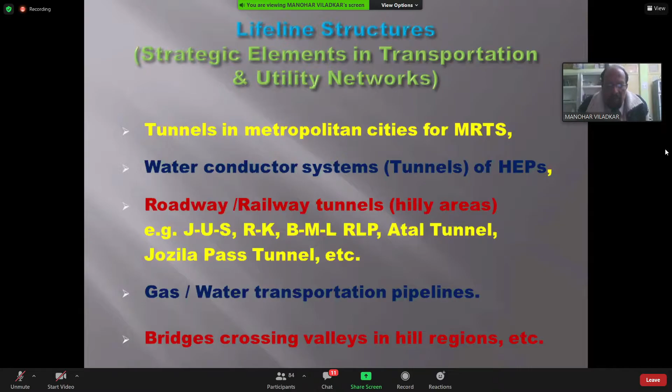But apart from these tunnels for different purposes, we also have gas and water transportation pipelines, and similarly the bridges which cross valleys in hilly regions. Now these are structures which are very long in comparison to their cross-sectional dimensions. You have pipelines which run over a length of a few hundred kilometers, metro underground systems that run over a length of a few kilometers, and railway line projects in hill areas that run to a length of about a few hundred kilometers.

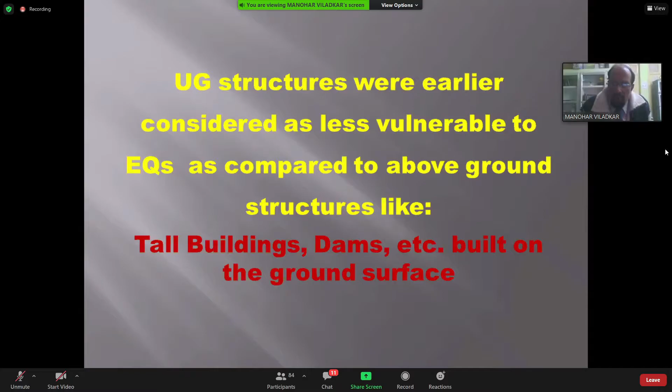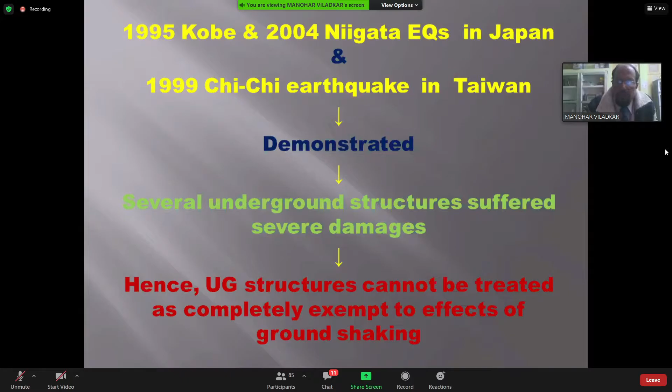Underground structures were earlier considered less vulnerable to earthquakes compared to above-ground structures like tall buildings and dams built on the ground surface. However, the 1995 Kobe earthquake, or the 1999 Chi-Chi earthquake in Taiwan, clearly demonstrated that several underground structures can suffer severe damages depending upon various parameters at a site. Therefore, underground structures cannot be treated as completely exempt from the effects of ground shaking.

In India, there is a growing need at present to enlarge infrastructure, especially in hill areas. We have mass rapid transit system networks in metropolitan cities, all-weather connectivity in hill areas, particularly the northern and northeastern states, and also connectivity in strategically important areas from the defense point of view. Because of these, there is a renewed interest in studying the vulnerability of lifeline structures to seismic loading.

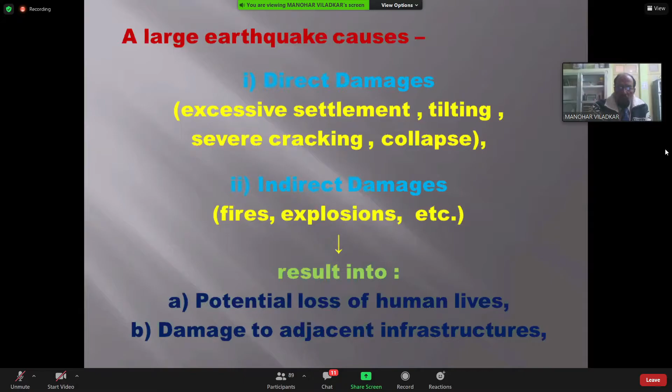A large earthquake causes direct damages in the form of excessive settlements, tilting, or severe cracking of structures, and sometimes even collapse of structures. There are also indirect damages in the form of fires and explosions, which result in potential loss of human lives and damage to adjacent infrastructures. All this causes severe economic losses, especially in view of the time required to restore the functionality of various infrastructures. It is therefore essential to reduce the possible associated damages and their consequent effects.

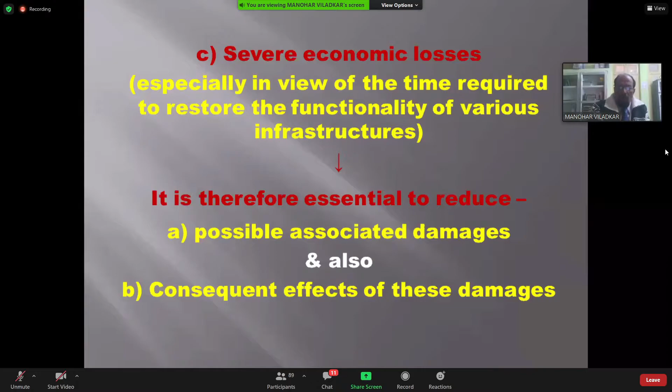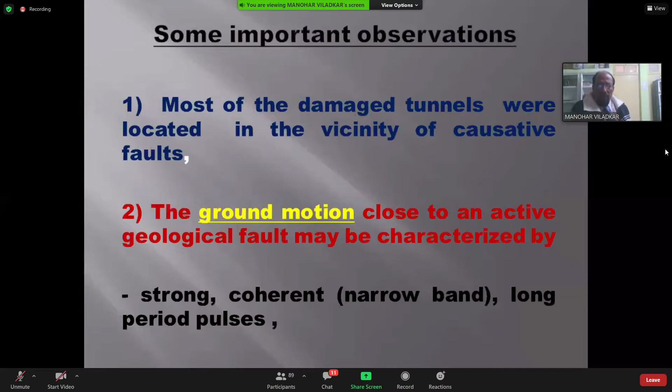Most of the tunnels - there are some important observations based on earlier failures in such lifeline structures. Most of the damaged tunnels were located in the vicinity of causative geological faults. The ground motion close to an active geological fault may be characterized by strong, coherent, narrow-band, long-period pulses, and this ground motion is severely affected by the rupture mechanism along the fault plane and the direction of rupture propagation in relation to the particular site or project in question.

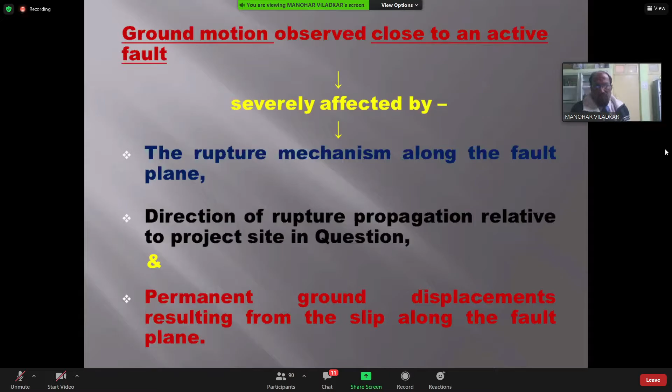There can also be permanent ground displacements resulting from slip along major geological fault planes. Based on a study of damage to about 71 tunnels excavated in rocks due to earthquake shaking, and comparison of their behavior with estimated values of peak ground acceleration and peak ground velocity, it was suggested that collapse of tunnels due to ground shaking occurs only under extreme conditions.

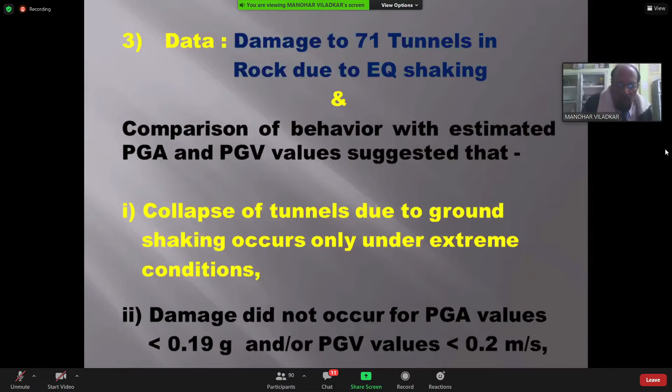It was found that damage did not occur so long as PGA values were less than about 0.2 g, or PGV values less than about 0.2 meter per second. Minor to moderate damages were observed when PGA values approached about 0.5 g, whereas moderate to heavy damage was experienced when PGA values exceeded 0.5 g.

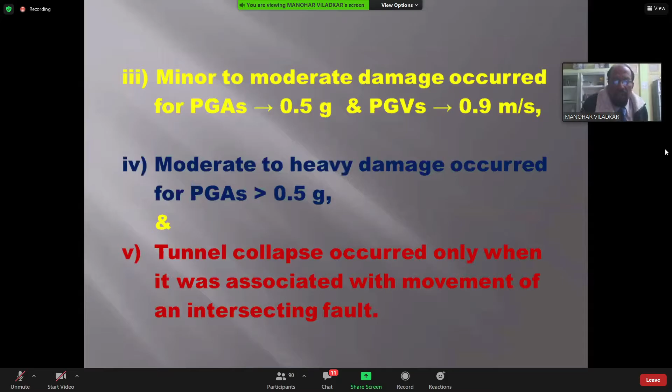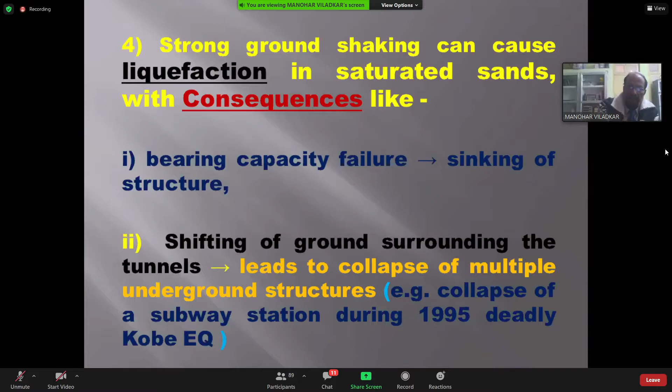The tunnel collapse occurred only when it was associated with the movement of the intersecting geological fault. The strong ground shaking can also cause liquefaction in saturated sands, with consequences like sinking of structures or shifting of the ground surrounding the tunnels, which leads to collapse of multiple underground structures. The famous case is the collapse of a subway station during the 1995 Kobe earthquake in Japan. This liquefaction is also responsible for causing landslides, consequently damaging highway facilities.

Landslides also generate secondary impacts. There occurs a rupture of water and gas supply pipelines, and more importantly, the electrical transmission lines, which cause dramatic explosions and fires. This was what exactly happened during the 1994 Northridge earthquake in USA, when the ruptures of the gas pipelines occurred.

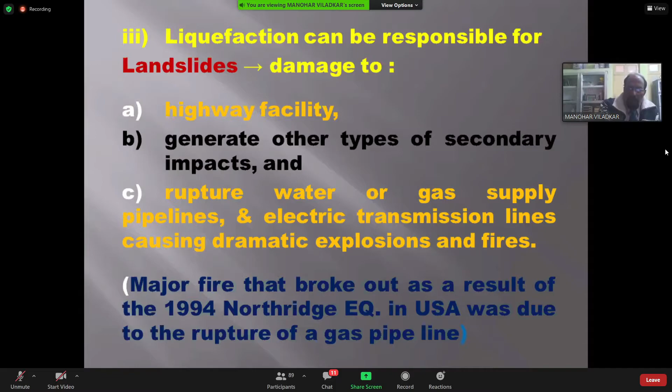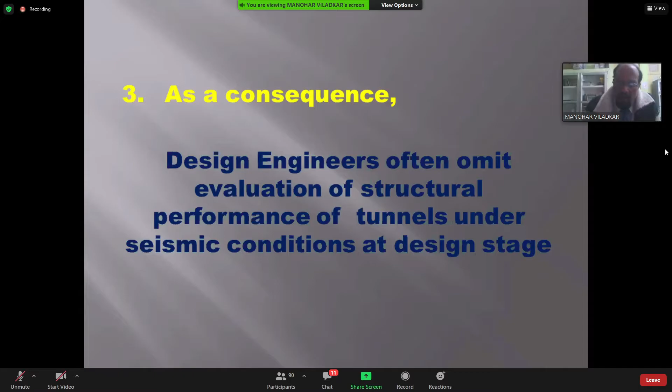The net outcome of this is that seismic analysis of underground structures is a complex task, as it involves interaction of several disciplines, including structural geology, seismotectonics, engineering seismology, soil and rock dynamics, and also structural dynamics. This area has remained somewhat neglected, primarily because of the conventional notion that underground structures are not sensitive to earthquakes. As a consequence, design engineers often omit the evaluation of structural performance of tunnels and such lifeline structures under seismic conditions at the design stage.

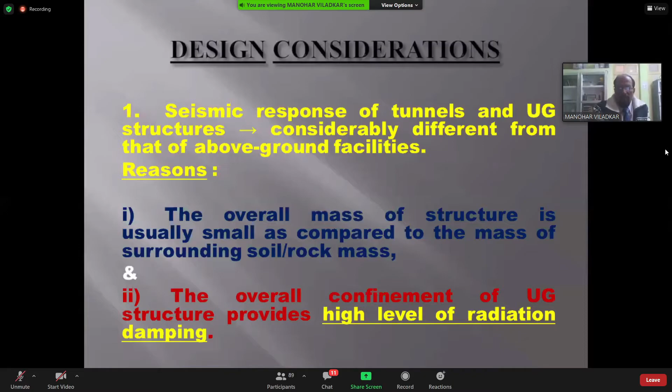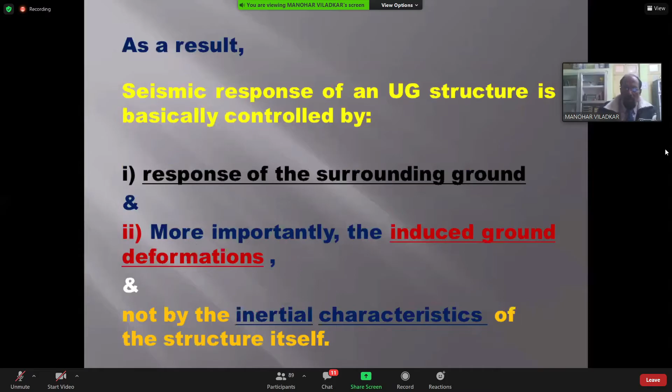Let me bring out some of the design considerations which should be followed while carrying out initial designs. The first one is that seismic response of tunnels and underground structures is considerably different from that of above ground facilities, because the overall mass of the structure is usually very small as compared to the mass of the surrounding soil or rock mass. The overall confinement of the underground structure by the surrounding soil or rock mass provides a high level of radiation damping, and as a result, seismic response of underground structures is basically controlled by the induced ground deformations rather than the inertial characteristics of the structure itself.

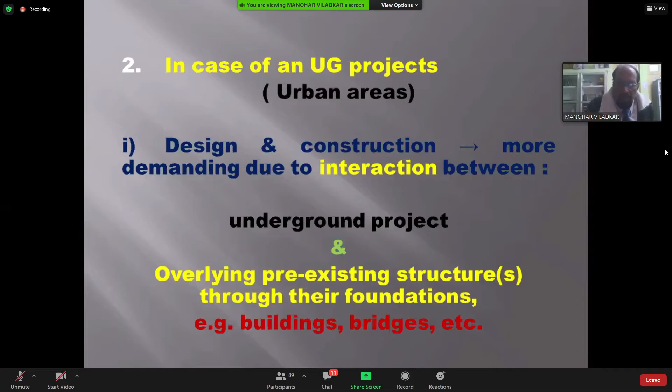In case of underground projects, particularly in urban areas, design and construction is more demanding because of the interaction between the underground project and the overlying pre-existing structures through their foundations. These are the issues where people go to the court of law to seek compensation in case the above ground structure is damaged or affected by the underground activity.

The interaction of these underground lifeline structures is basically a function of the depth of overburden or the thickness of the overburden above the bedrock, and the nature of topography, particularly in hill areas. The topography is very uneven. This results in what we call seismic amplification, and this seismic amplification was the cause of damage to bridges during the 1995 Kobe earthquake.

It was also the cause for damage to the underground tunnels and buried gas pipelines during the 1999 Chi-Chi earthquake in Taiwan. So therefore, the selection of realistic ground motion is very important from the seismic analysis and design point of view of these lifeline structures. The time history of earthquake has to match the expected earthquake in that particular zone or at the particular project site in question, and hence there is a need for what we call the response spectra compatible time history.

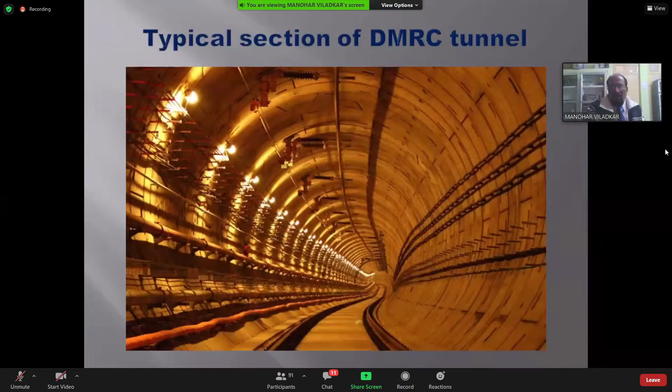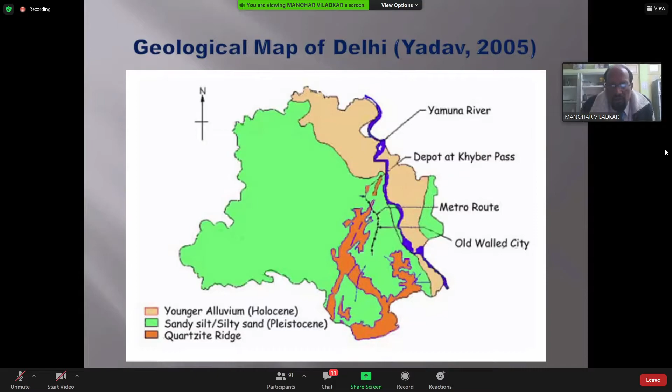I'm going to briefly take the case of Delhi Metro underground tunnels, particularly constructed in the early phase 1. This is a typical cross-section of the DMRC tunnel in Delhi. Delhi lies... this is the geological map of Delhi city. You have got the Yamuna river flowing in the north-south direction. And you have got basically either the younger alluvial deposits or the sandy silt deposits below the ground surface in Delhi city. In some portions in the north-south direction, you have also got the quartzitic ridges.

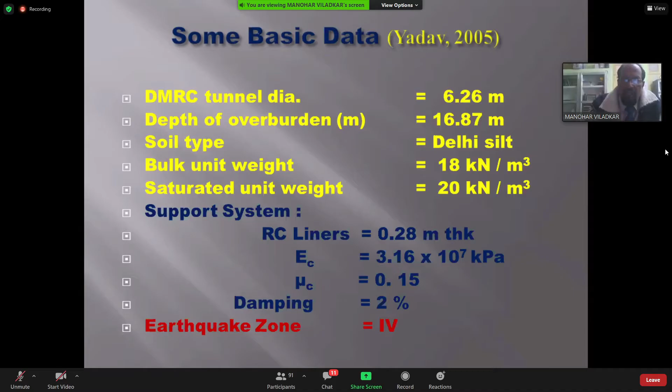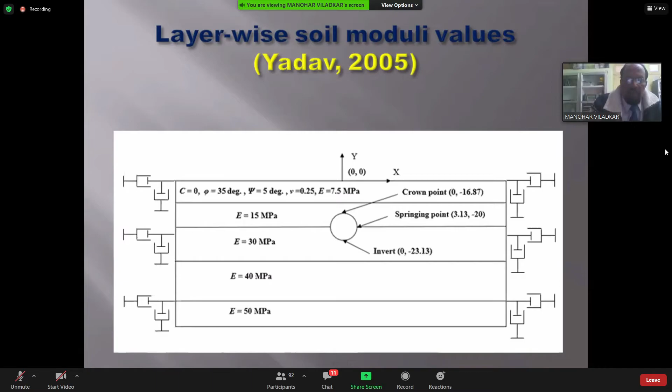The tunnel diameter is about 6.26 meters, and the depth of overburden above the crown of the tunnel is about 16 or 17 meters. The tunnels are provided with precast RC liners, and you know very well that Delhi lies in seismic zone 4 as per the seismic map. The modulus of the soil mass varies from the ground surface, with a value of about 7.5 megapascals to about 50 megapascals at a depth of about 60 to 70 meters below the ground surface.

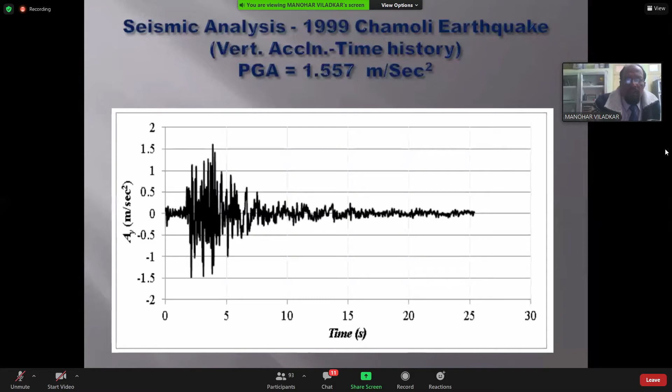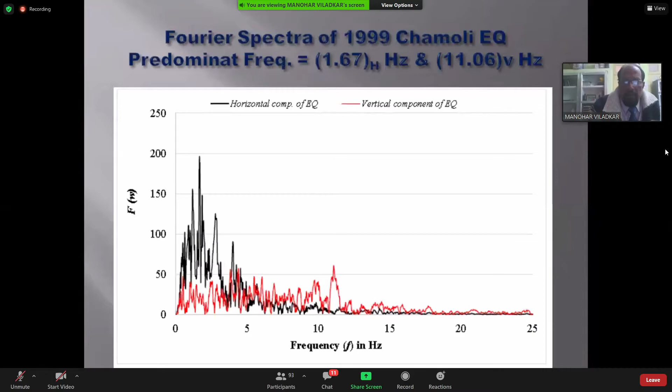In order to develop the response spectra compatible time history, we tried to generate the target response spectra on the basis of IS code 1893. This was generated both for the maximum considered earthquake and the design basis earthquake, for different values of damping ratios of Delhi silt corresponding to about 5%, 10%, and 15%.

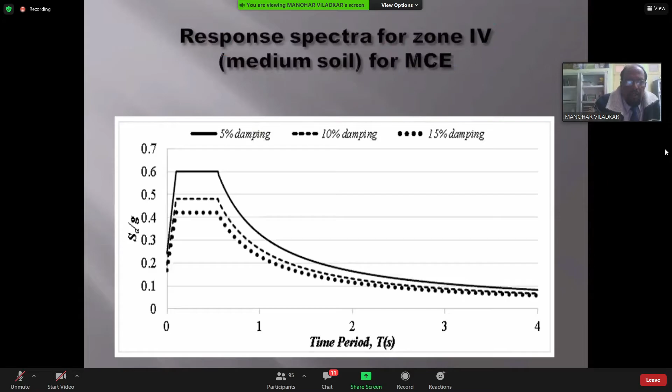That's the typical response spectra for the maximum considered earthquake for zone 4 of Delhi for different values of damping, including 5%, 10%, and 15%. So I find that corresponding to the minimum value of damping, I've got a maximum PGA of about 0.6.

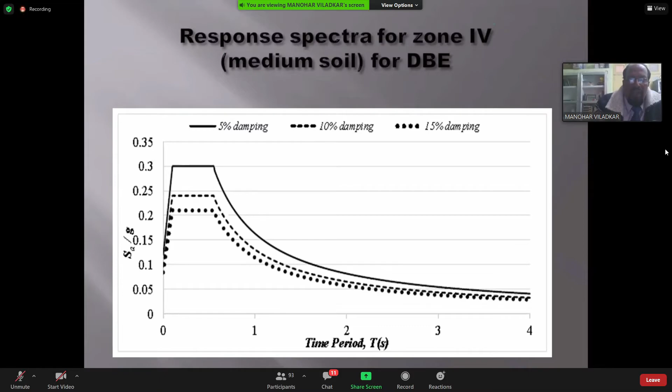This is the response spectra corresponding to the design basis earthquake, and I find that the magnitude of SA upon G is roughly half of that for the MCE.

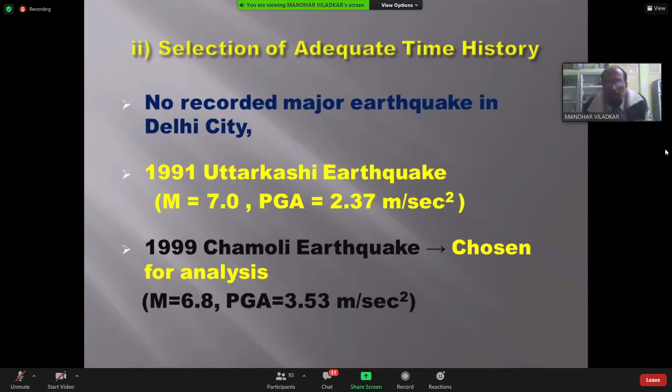Then we have to select adequate time history. In fact, in Delhi, there is no record of a major earthquake, so the nearest earthquakes were the 1991 Uttarkashi earthquake with a magnitude of 7.0 and a PGA value of 2.37 meters per second square, and the 1999 Chamoli earthquake with a magnitude of 6.8, but a PGA value much higher than Uttarkashi, at 3.53 meters per second square.

Now, Chamoli and Uttarkashi lie in zone 5 of the seismic map, whereas Delhi city lies in zone 4, and therefore there was a need to generate artificial time history for Delhi city.

Taking a magnitude of acceleration from the target spectra and a phase from the input history, response spectra compatible time histories were generated using three software packages: SPEC3 and WaveGen, which were developed at IIT Roorkee, and Seismomatch, developed by Hancock and his team in 2006.

The typical observation is that the trend of the artificial time history generated by the Seismomatch software developed by Hancock is quite similar to the actual earthquake, except for a difference in the value of PGA.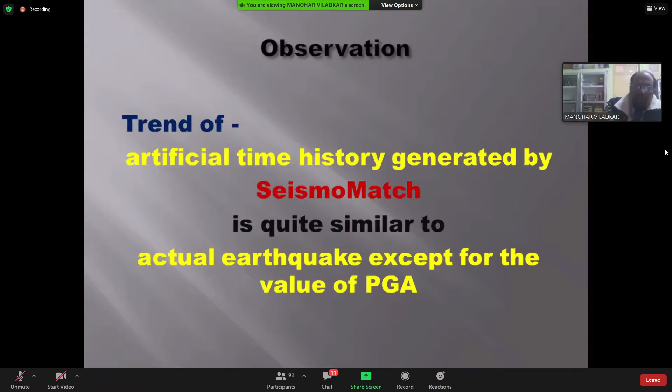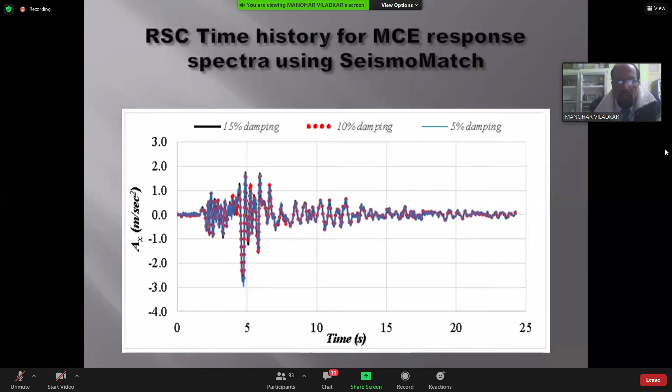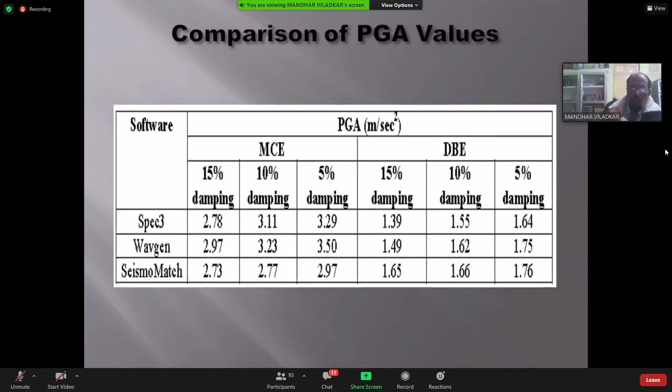So this is a typical response spectra compatible time history obtained by the Seismomatch software corresponding to 5, 10, and 15% damping ratio. When I try to see the effect, I find that both for MCE and DBE, the PGA values go on increasing as the damping ratio goes on reducing.

When I study the horizontal displacements of the soil tunnel system, I find that the Seismomatch software gives a value of about 200 mm near the ground surface, and very close to it at other points around the periphery of the tunnel, including the crown, the invert, and the springing points. The DBE also gives the same range of horizontal displacements.

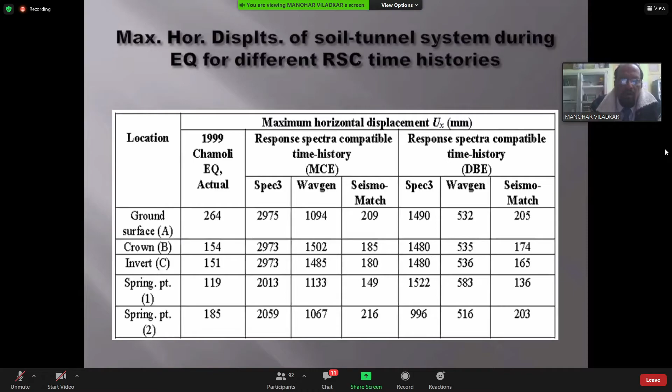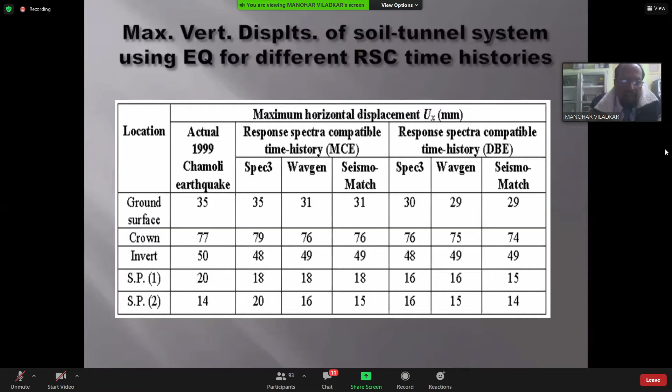As far as the vertical displacements are concerned, all three software packages, or all three response spectra compatible time series for MCE and DBE, give values which are very close to each other at all the critical points, including the periphery of the tunnel and the ground surface.

Professor, only 5 minutes left. Okay, so...

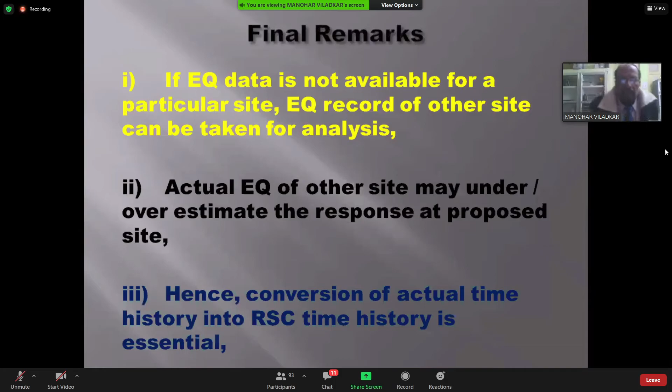The most important thing that I have observed is that the presence of tunnels below the ground surface, or excavation of tunnels, modifies the response at the ground surface, and therefore the structures lying on or constructed on the ground surface are significantly affected.

We try to consider the three-dimensional analysis also, especially because these lifeline structures like highways, underground highway tunnels or railway tunnels, or gas supply pipelines, all extend over lengths of kilometers. You can have significant changes in geology over lengths of a few hundred meters, with many geological discontinuities coming into play, so it is essential to study the 3D response of these underground structures, particularly in the longitudinal direction or the axial direction of the tunnels.

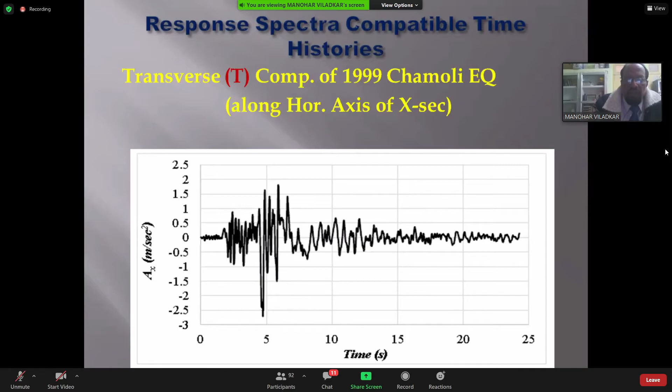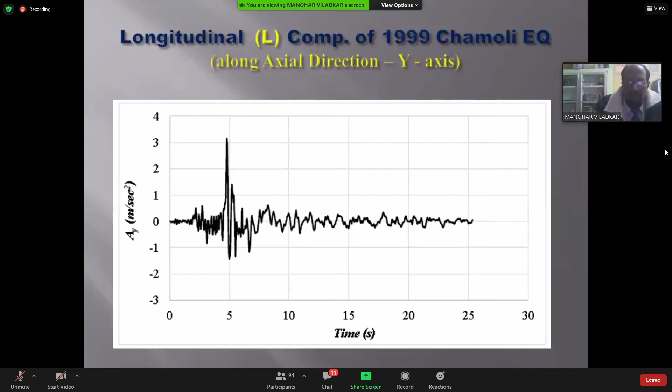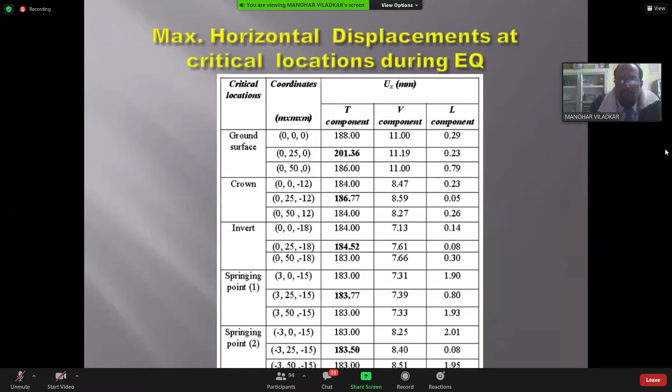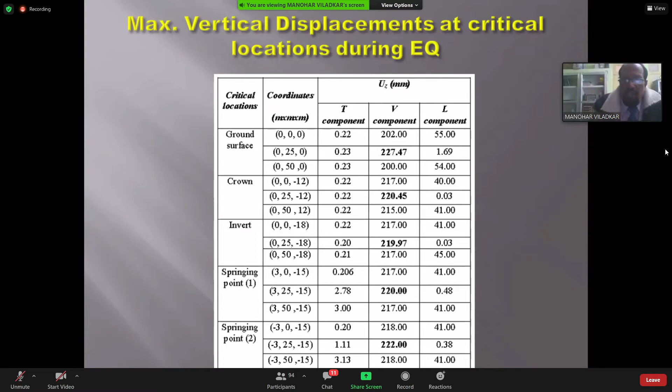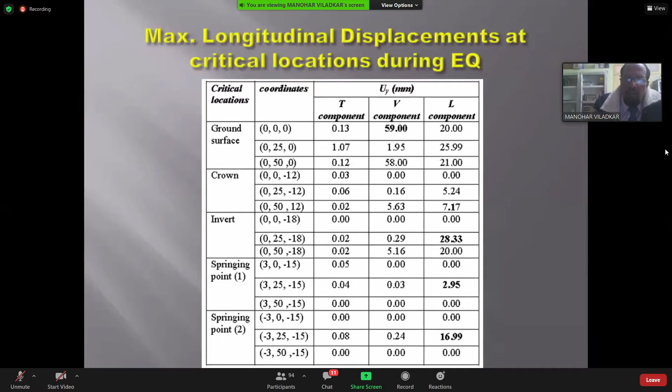When we consider these response spectra in all three directions, I find that maximum horizontal displacements are affected essentially by the transverse component of the earthquake, whereas maximum vertical displacements are affected both by the vertical and the longitudinal components of the time history. The longitudinal displacements along the axis of the tunnels are affected by both the longitudinal and vertical components, especially at the ground surface.

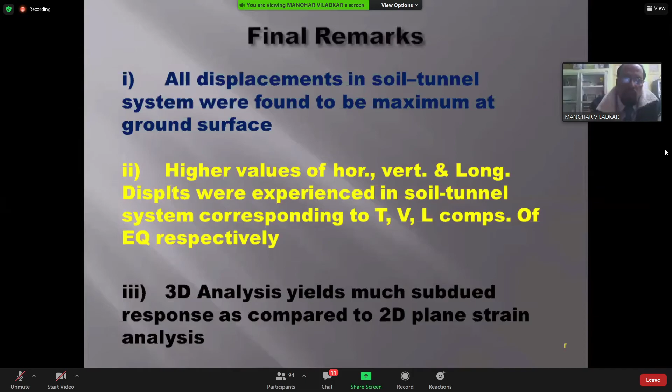3D analysis in general gives a much subdued response as compared to any 2D analysis. Then we try to consider a significant parameter in the form of liquefaction, because you are involved with a geological strata which runs over a length of few hundred kilometers. It is essential to consider the aspect of liquefaction.

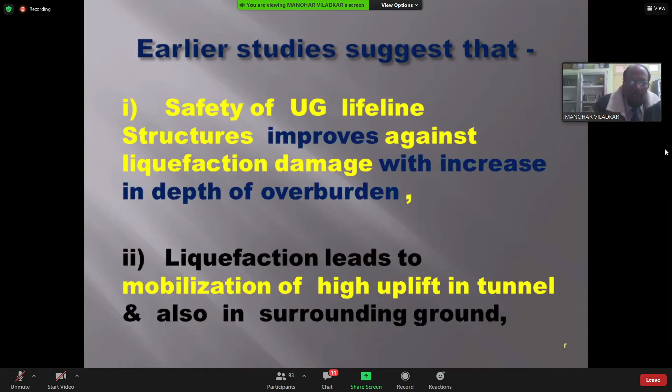Earlier studies have shown that safety of underground lifeline structures improves against liquefaction damage with increase in depth of overburden. Liquefaction leads to mobilization of high uplift in the soil tunnel system. It also leads to increase of forces in the tunnels, and the acceleration response at different depths was found to attenuate significantly due to occurrence of liquefaction.

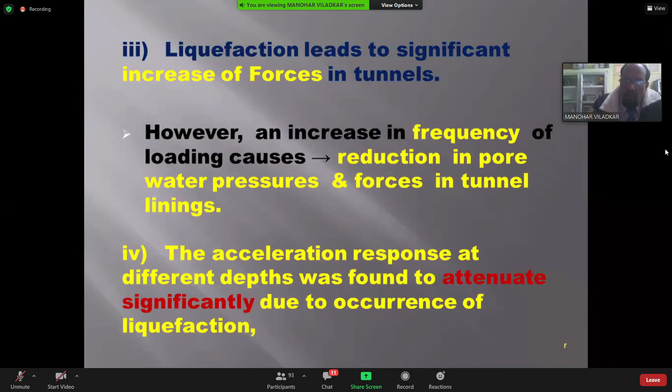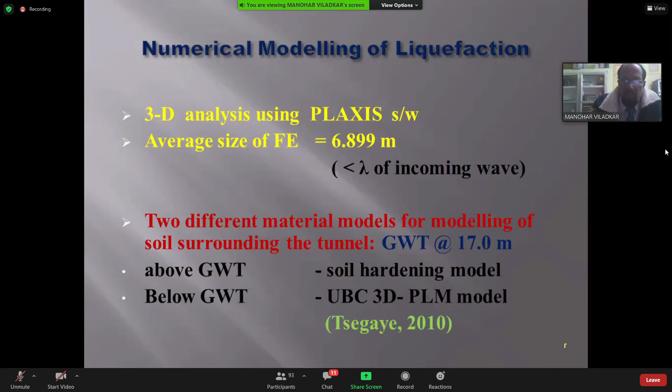We try to carry out numerical modeling of this liquefaction phenomena, particularly for the Delhi metro tunnels, using what we call the UBC 3D-PLM model for the constitutive relationships, in terms of pore pressure ratio, which is basically in terms of the effective mean stresses, and the state variable R sub u, which is in terms of the effective vertical stresses.

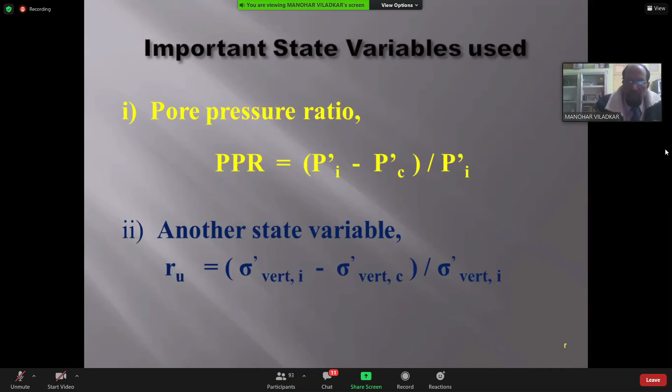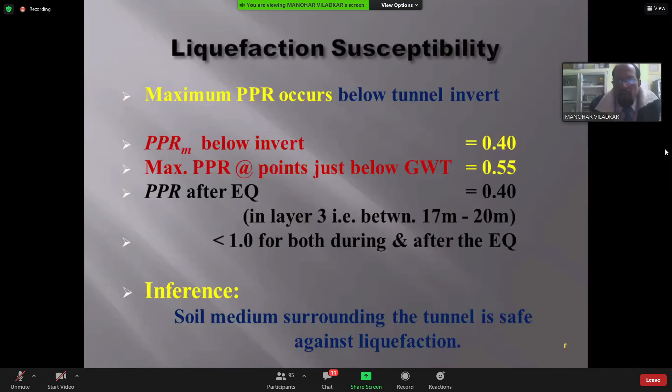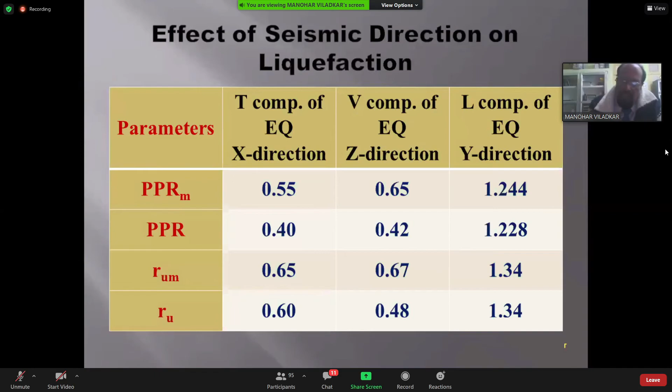When I compare the pore pressure ratios which are developed or mobilized, I find that they are less than 1 corresponding to the horizontal and vertical components. But when I go to the response corresponding to the longitudinal component, I find that both the pore pressure ratio and the state variable R sub u exceed the value of unity, indicating that the longitudinal component of earthquake can cause liquefaction and therefore damage to the underground structures.

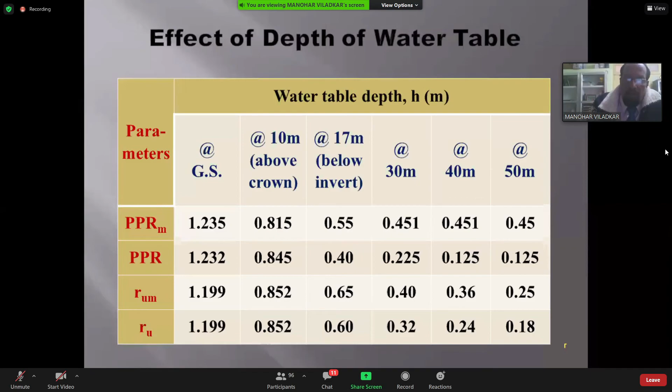When I study the effect of the depth of the water table, as the water table rises, there is a tendency or possibility of liquefaction taking place. Particularly in case of Delhi metro tunnels, when the water table rises from a depth of about 10 meters towards the ground surface, then there is a possibility of liquefaction. Existing level of water table is about 17 meters below the ground surface.

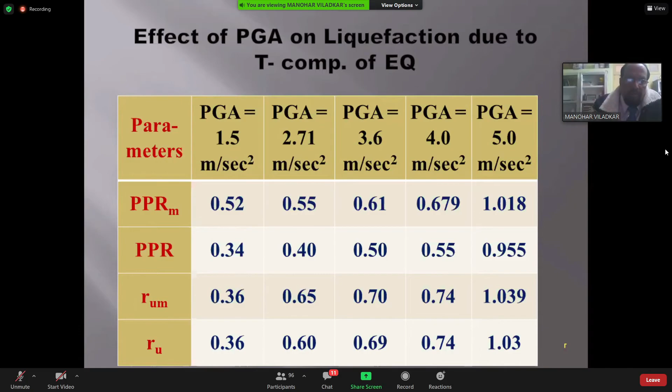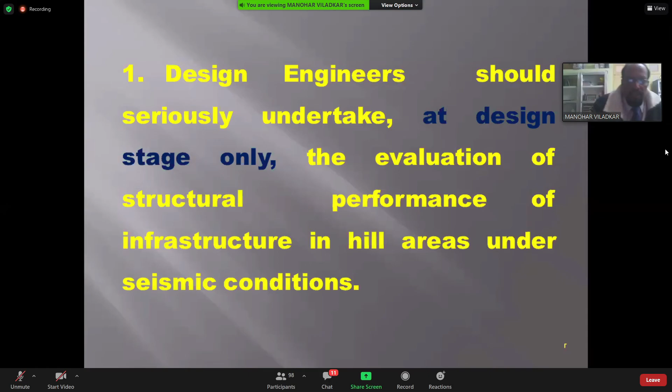So my final recommendations as far as analysis and design of lifeline structures is concerned: the first one is that design engineers should seriously undertake at the design stage only evaluation of structures in hill areas and in metropolitan cities where the underground activity is going on, particularly against earthquake.

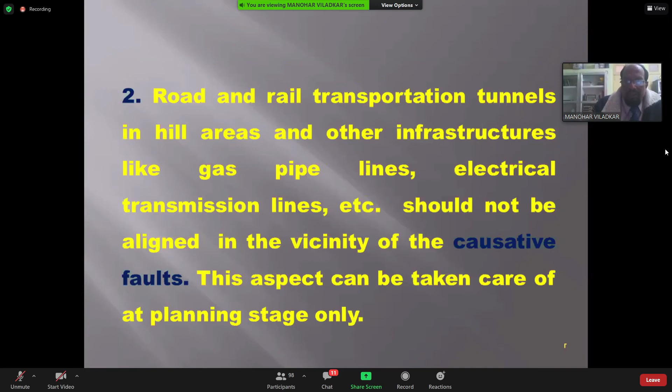Secondly, the road and rail transportation tunnels in hill areas and other infrastructures like electrical transmission lines, etc., should not be aligned in the vicinity of the geological causative faults. This aspect can be taken care of right at the planning stage only.

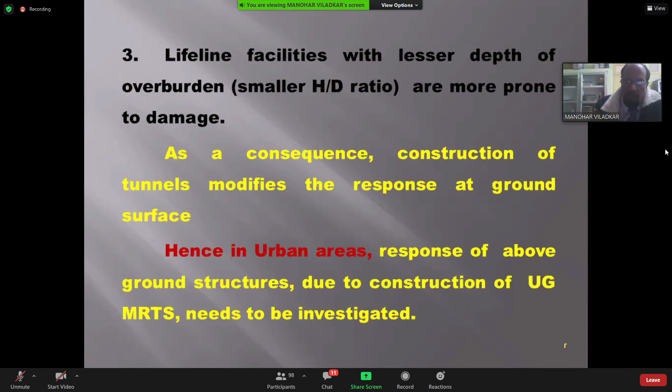The third recommendation is that lifeline facilities with lesser depth of overburden are more prone to damage. As a consequence, construction of tunnels modifies the response at the ground surface, and hence in urban areas, especially in metropolitan cities, response of the above ground structures due to construction of underground projects needs to be thoroughly investigated. Otherwise, it gives rise to problems of litigation.

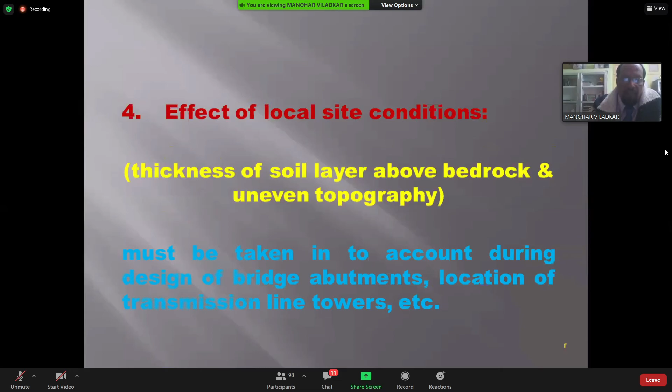The fourth recommendation is the effect of local site conditions, particularly the thickness of the soil layer above the bedrock and the uneven topography. This must be taken into account during the design of structures like bridge abutments in hill areas, and the alignment of transmission line towers, highways, or railway tunnels in hill areas. It is also essential to generate the response spectra compatible time histories specific to a particular zone or site in question.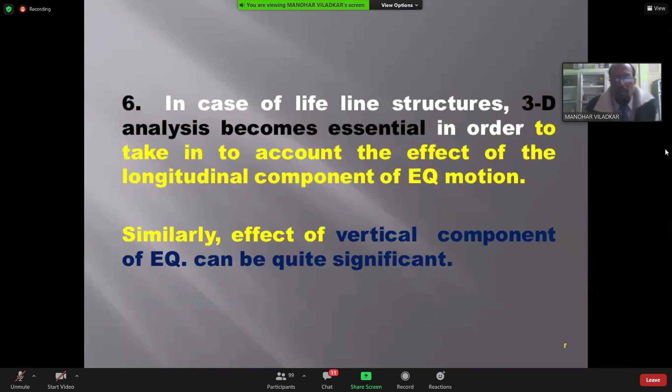In case of lifeline structures, it is essential to carry out and understand the 3D response, particularly because the longitudinal component of the earthquake can cause either damage to the below ground structure, or it can bring about liquefaction and consequent damage to the lifeline structure.

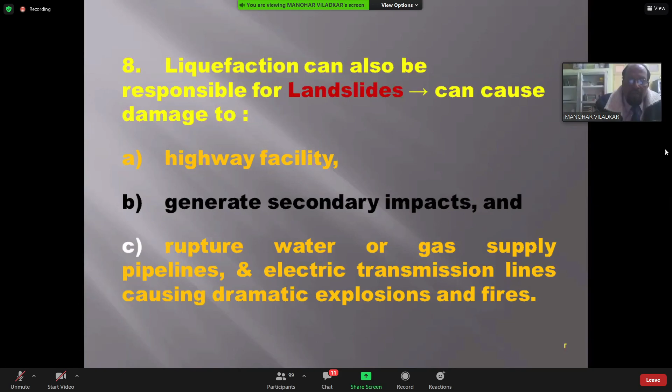The liquefaction in hill areas can also give rise to landslides and therefore damage the highway facilities. It generates secondary impacts and may cause the rupture of water or gas supply pipelines and uprooting of the electrical transmission lines.